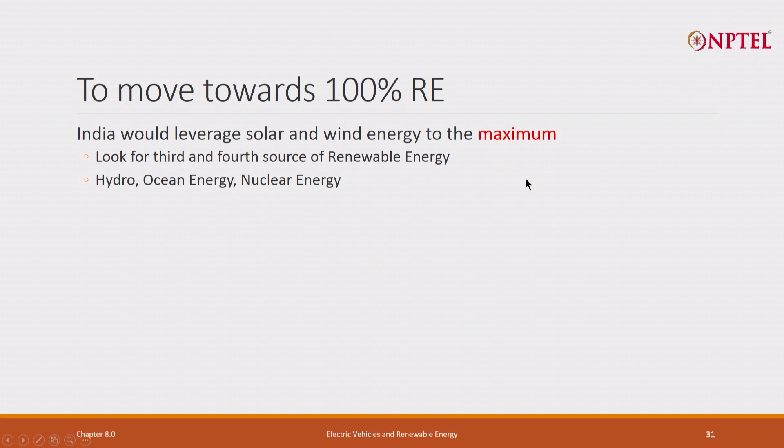India would leverage solar and wind to the maximum, but look for a third and fourth source of renewable energy. Is hydro possible? Is ocean energy possible? Is nuclear energy possible? Earlier we did not consider this. We will get up to 70%, and for the remaining 20-30%, we have to look at these things.

They may look bad today, but that is where R&D comes in and they will start looking good tomorrow. All kinds of storage options need to be explored. So far, we have looked at primarily lithium ion and chilled water.

Of course, tomorrow's solid state lithium ion, but they will also be short term storage. Flow battery, we will look at. Will there be long term storage? For example, zinc air, zinc metal, aluminum air is being talked about. Can they be long term storage? This needs to be seriously examined.

Remember, if the long term storage is even slightly more expensive, it does not matter, it will average out. I am not going to store everything, probably 10-20% of the energy. So that cost will go up, but may not be that bad. Probably 10% of the energy in the country, if I can do long term storage, I probably will be able to work it out quite well.

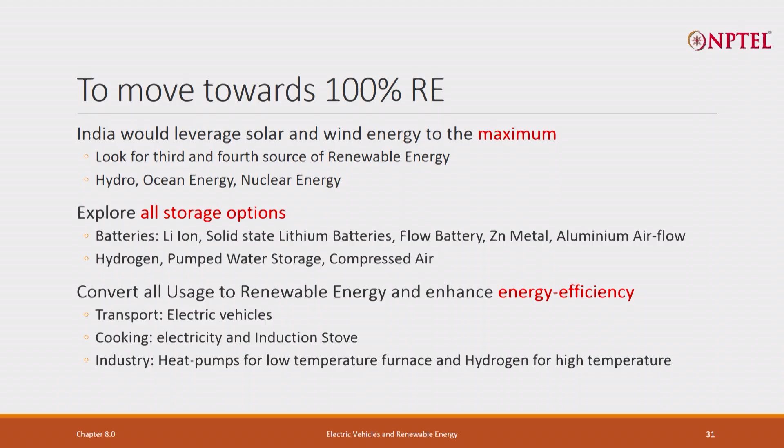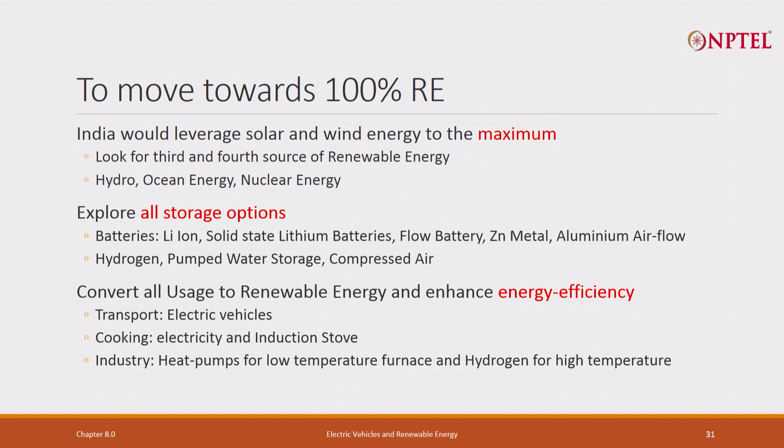For low temperature I can use heat pumps. What are heat pumps? Very similar to cold pumps which you use for refrigeration. A whole lot of efficient heat pumps can be developed. Then for high temperature, that is where hydrogen usage is very good. Hydrogen storage we do not know, but for high temperature, make hydrogen from renewable energy and then use it.

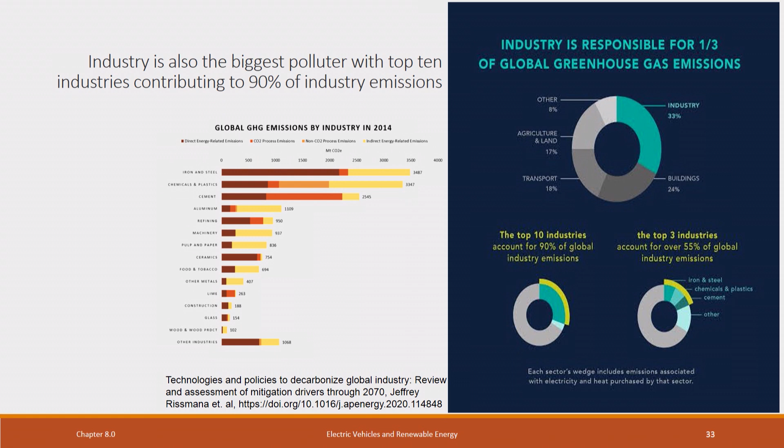Let us look at some other things. Hydrogen fuel is clean and flexible, very clean. Hydrogen can be burnt and used directly, or mixed with oxygen into a fuel cell. So, it can either be fuel cell or burnt.

But you know, hydrogen is not an energy source, it is an energy carrier. So, you have to use renewable energy to make hydrogen, or some other energy. So, hydrogen needs to be made from something. If it is made from renewable energy, of course it is very good. But if it is made from fossil fuel, which is done today, it is an indirect use of fossil fuel. This is not making our hydrogen good. And today most of the hydrogen is generated using fossil fuels.

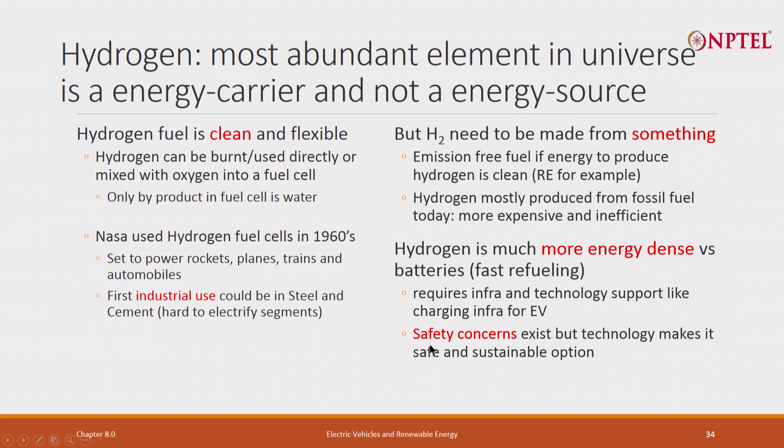Of course, hydrogen is far more energy dense compared to battery. You can compress the hydrogen and do fast refueling. It requires infrastructure and technology support like charging, more like petrol pumps. There are huge safety concerns. Compressed hydrogen is not good, but industry can make it safe. Cost is 800 to 900 rupees per kg.

But what does that mean? We will come to that in a minute. But you know, there are different types of hydrogen. There is black hydrogen made from coal, the most polluting. There is brown hydrogen made from biomass and lignite, which is also highly polluting, or blue hydrogen from ammonia, which is better. Green hydrogen comes from electrolysis using renewable electricity.

So, until you use green hydrogen, this cost of 800 to 900 is for these things today, not for green hydrogen. Green hydrogen is more expensive. The energy used to generate hydrogen, lowest energy form is coal and biomass, higher using ammonia reforming, passing through a catalysis to form hydrogen.

But if I am using ammonia, one should ask, should you make hydrogen from ammonia, or use ammonia directly? It can be supplied in liquid form, just like hydrogen can be supplied in liquid form. So, the question that is starting to be asked, if you are going to use ammonia, why not have long distance trucks using ammonia directly instead of hydrogen?

Look at this. If I use a fuel cell to convert electricity, my cost is 80 to 90 rupees per kilowatt hour. It is even much higher than petrol cost per kilowatt hour. Petrol I can today convert at 25 rupees per kilowatt hour. This is much higher. Diesel generator does that, diesel.

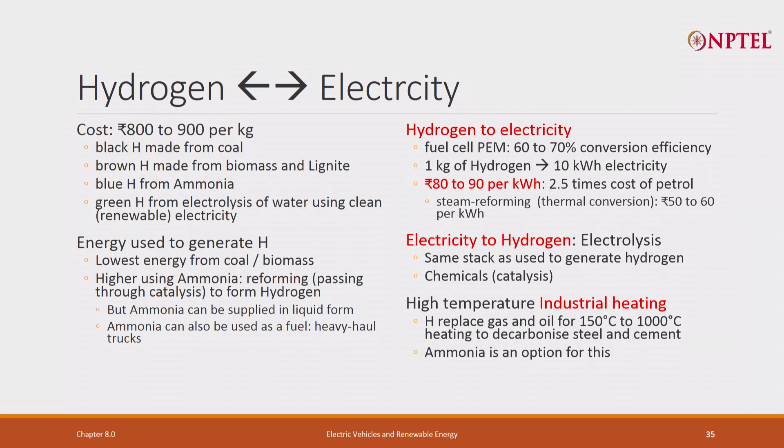And still the drums the government beats is hydrogen. Why? First of all, particularly during Trump days, United States moved away from renewable energy. Their declared policy was to use fossil fuels. And they started promoting hydrogen, because all this oil and the whole Middle East oil industry, they feel that hydrogen is very much like they didn't want electric vehicles, they wanted hydrogen.

And India more or less copies. The Middle East of course still pushes hydrogen, and while hydrogen is useful particularly for industry and we need that, blindly beating that drum is a problem. Remember the cost.

Can the cost come down by 10 times? Yes, doable, that will require R&D. If it comes down to 8 to 9 rupees, this is only hydrogen to electricity, this is not storage. We have not taken electricity to hydrogen. We have to take that into account. So this is electrolysis, same stack, this is also very expensive right now. So together it has to come to 10 to 12 rupees for us to make sense.

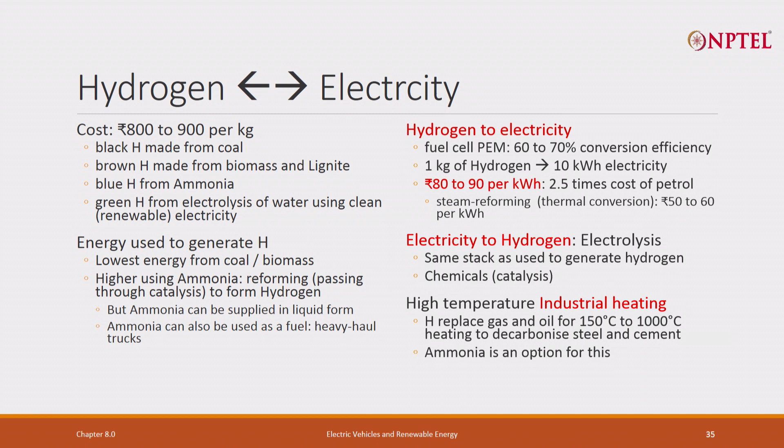As I talked about, for high temperature industrial heating from 150 to 1000 degrees, there is no comparison. Ammonia can be a soft option, but otherwise hydrogen. But yet hydrogen is projected to become a $500 billion industry. Let us remember one more thing, energy that goes into hydrogen, what comes out is less.

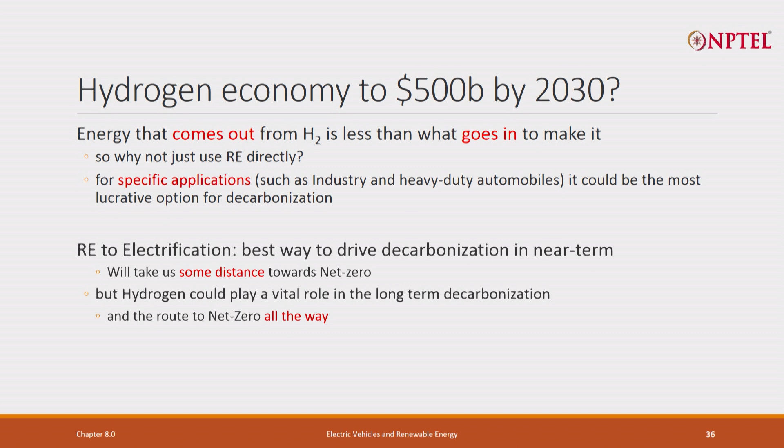So, the question some people are starting to ask is, why not use renewable energy directly? Well, the only answer is some place hydrogen is better, particularly in industrial usage, and maybe in heavy duty automobiles, because carrying battery will be a problem. So, there is no doubt that renewable energy to electrification is the best way to drive decarbonization in the near term. Once you get to 70-75%, hydrogen will play a very important role. For industry, it will play an important role even today.

Let me very quickly go through flow battery. Flow battery has liquid, anolyte and catholyte, and there is a flow of this liquid through these battery elements. These are vanadium, used to be touted like anything. Today vanadium is not considered that good, but there are a whole lot of others: zinc bromide, zinc ferride, hydrogen bromide, zinc iodide. These are batteries which work.

They are still in R&D phase, still very expensive.

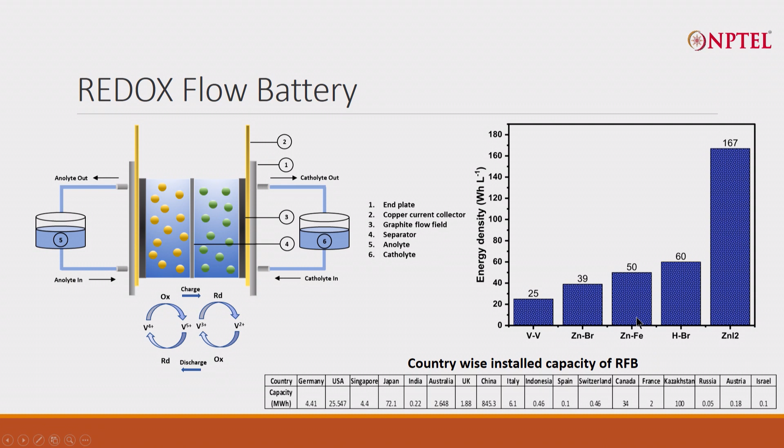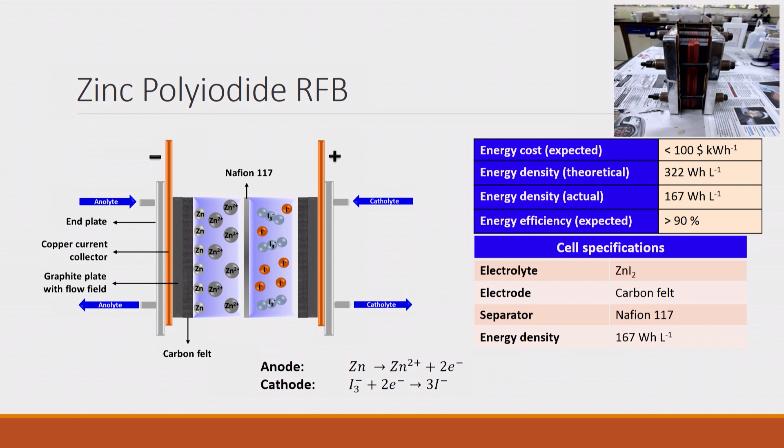Particularly, these are something highly promising. This is zinc polyiodide - zinc and iodine interacting. Its energy density is 167 watt hour per liter, less than lithium ion, but theoretical energy density is 322. Cost is not that high, and materials for this are more easily available than lithium and cobalt, so it looks somewhat promising. Work can go on this zinc technology.

But there is this air flow battery, which is only a one-way battery, in the sense that it acts as a battery on one side - you can discharge it. You put in, for example, aluminum air, zinc air, lithium air - there are a lot of options. You put zinc into this with electrolyte, and it acts as a battery. It is a one-time usage battery, meaning after you take all the electricity out, the zinc is gone, electrolyte is gone. You have to put fresh zinc and fresh electrolyte - that is charging fresh zinc.

Now, what do you do with the spent zinc and spent electrolyte? Fortunately, there is a regeneration process by which you can get back the zinc and get back the electrolyte. This is like a storage system. There are two different plants: one keeps creating new zinc and new electrolyte, stores it, and whenever you need it, you use it in the other battery. If you can do this cost effectively, you can store it for 3 months.

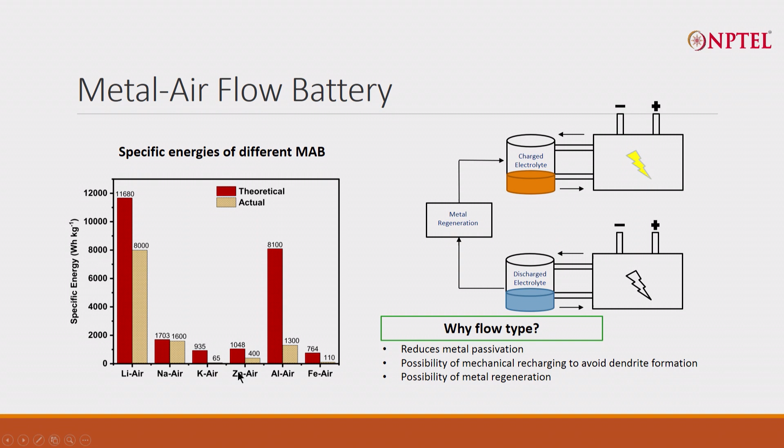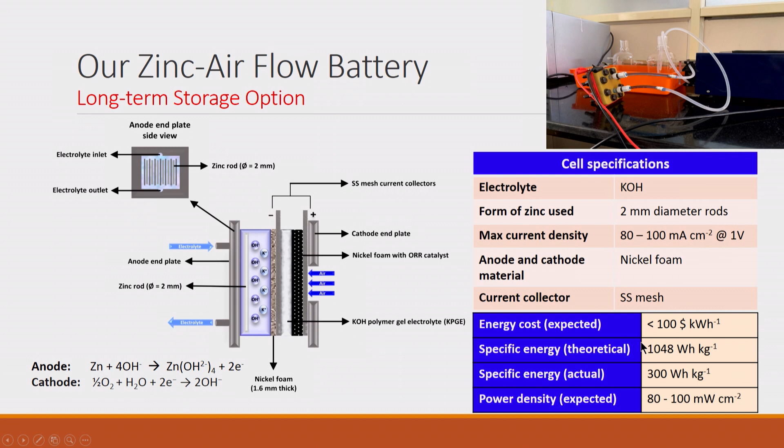And today, Zinc Air Flow Battery theoretical capacity is 1000 watt hour per kg, which is very, very good. Lithium ion today you do not get more than 300. Though we are getting about 400 watt hour per kg theoretical, 300 watt hour per kg actual, and they are slightly costly - but this is where R&D is required, and India needs to pursue this R&D.

Going forward, India would require expanding solar and wind - they will play an important role. A third source is important: small nuclear plants, though it will take 15 years for us to get there. Small nuclear plants can be like a tabletop plant - not exactly tabletop, but a small room plant. Can we have that?

You know, ocean energy today - large ocean energy - there are plants which convert it to electricity. Coastal India has much smaller ocean waves. Nobody is doing enough work on that, but that could be another important area of work.

The next very important thing is having a very good grid, so that if power is generated in Rajasthan, it can be brought here, or if wind is coming in Tamil Nadu, it can go anywhere. Can we have a grid across countries? For example, if I can connect a grid all the way to Saudi Arabia - when ours is evening and we consume a lot of electricity, theirs is daytime, and they will generate a lot of surplus. Can I bring that over? Then my storage will also not be required. Similarly, early morning when we do not have electricity, but Malaysia or Singapore or Vietnam will have it - can I bring that? Can I put a grid in the country and throughout the region?

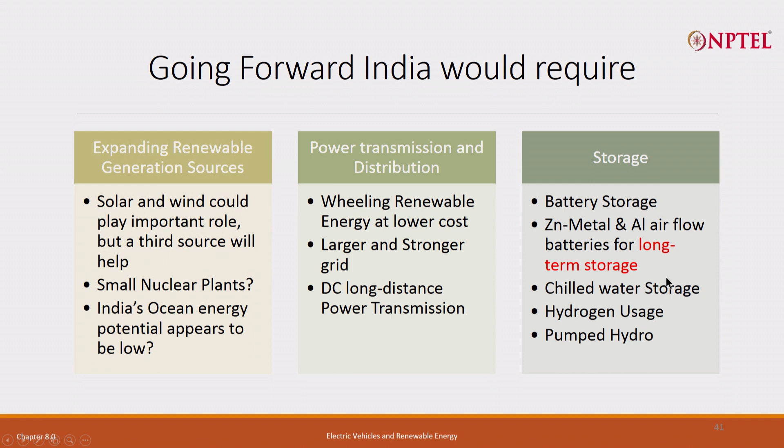Now, of course, we have to work on storage, as I told you - zinc air, zinc metal, aluminum air, chilled water storage, hydrogen, pumped hydro - all of them are important. Electric vehicles we have talked about - this is a high priority.

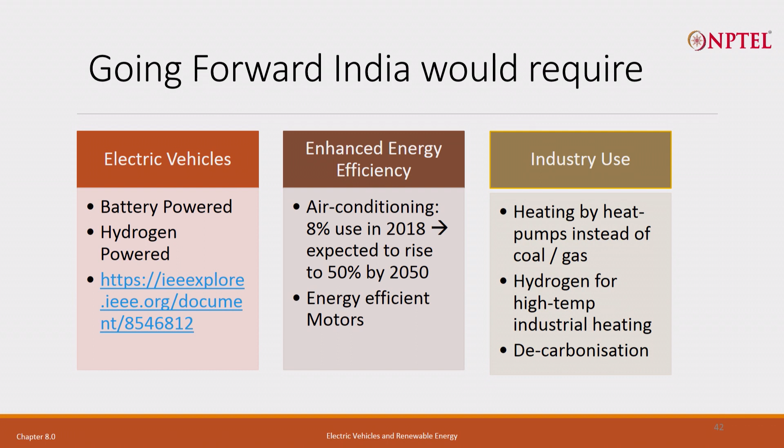Enhancing energy efficiency in air conditioning will be another top priority. Low temperature heating - we need efficient heat pumps of all kinds, which is a good area for Dr. Kaushal to work on. For high temperature heating, hydrogen, and then decarbonization - if you are polluting, can you take the carbon out from the polluting gas - that can be another area of work.

In agriculture, solar pumps can play an important role, along with electric powered tractors and machinery. In construction, can we replace all the machinery we use with electrically driven machinery? Sure, something that can be done in the next 4-5 years.

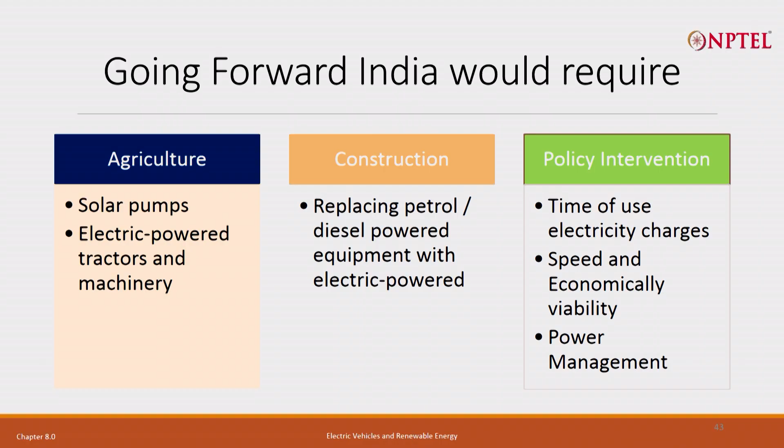All kinds of policy interventions will be required: time-of-use electric charges, speed of economic viability, power management, and making the wheeling policy way better. All this requires work, and this is exactly what we plan to do. This is another assignment, and with that I complete chapter 8.